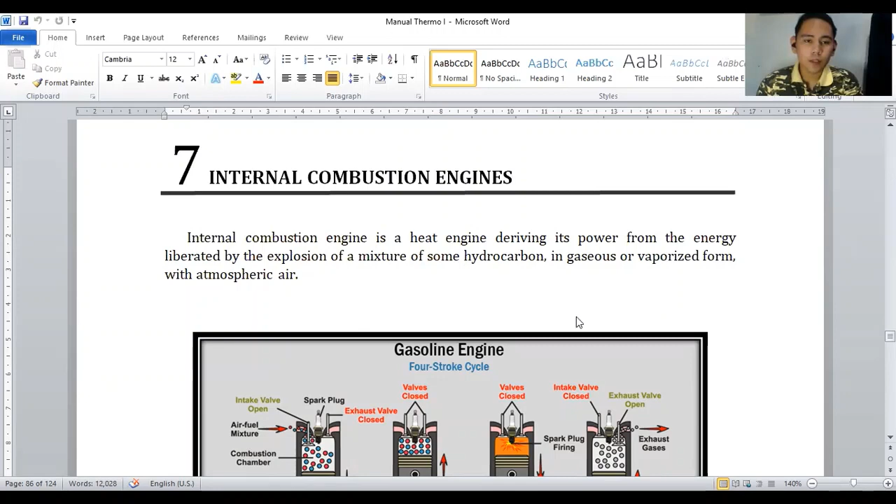The internal combustion engine is a heat engine deriving its power from the energy liberated by the explosion of a mixture of some hydrocarbon in gaseous or vaporized form with atmospheric air. So the internal combustion engine is a heat engine deriving its power from the energy liberated by explosion.

When you say explosion, it means combustion. When you say combustion, there is a fuel and air presence. In combustion engineering, a higher subject of mechanical engineering, you will tackle the combustion of different kinds of fuel. We have many different fuels.

And then when you pair it with air, what is its product? It should be water, carbon dioxide, and if there's excess air or insufficient air, it will have carbon monoxide.

But this time in Thermodynamics 1, we're going to tackle the fundamentals of the internal combustion engine, which is the cycle, the Otto cycle and the diesel cycle.

The first cycle is the gasoline engine or the gasoline cycle. The gasoline engine is also called the spark ignition engine. When we say gasoline engine, it is the Otto cycle.

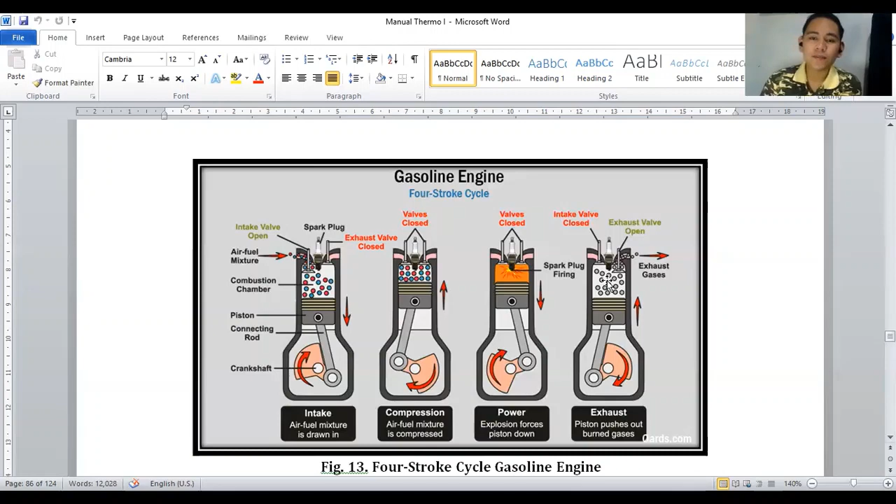And then the other half revolution, or the second revolution, which is the exhaust - everything that burns produces smoke. So therefore, the exhaust gases after the combustion will pass through the exhaust valve.

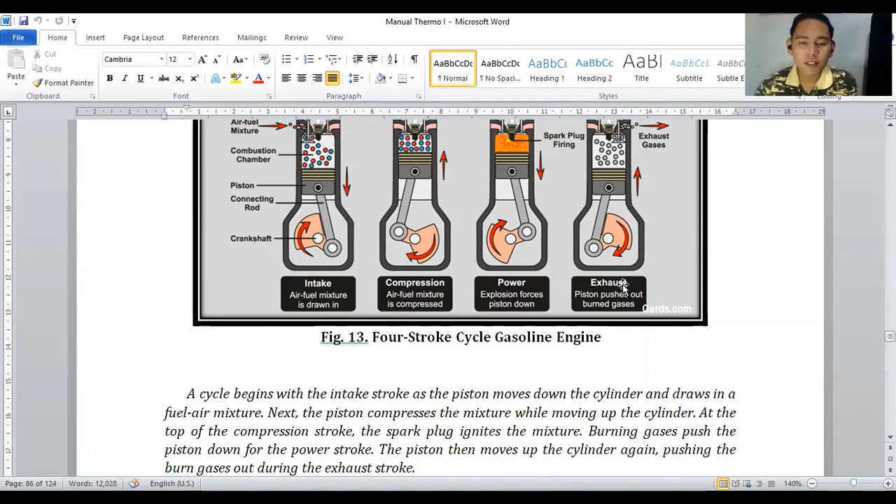So therefore, your half revolution, 1 revolution, 1.5 revolution, and the second revolution. So therefore, there are 2 revolutions that take place in a 4-stroke cycle gasoline engine.

A cycle begins with the intake stroke as the piston moves down the cylinder and draws in a fuel-air mixture. Next, the piston compresses the mixture while moving up the cylinder. At the top of the compression stroke, the spark plug ignites the mixture. Burning gases push the piston down for the power stroke.

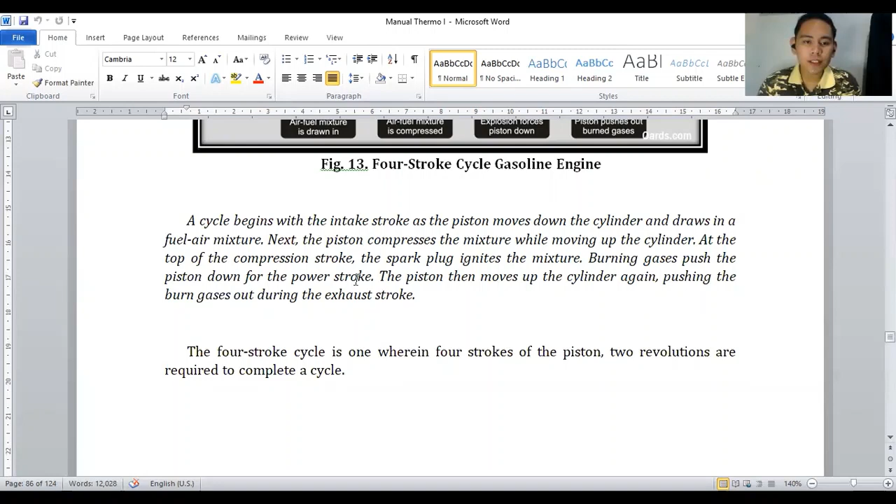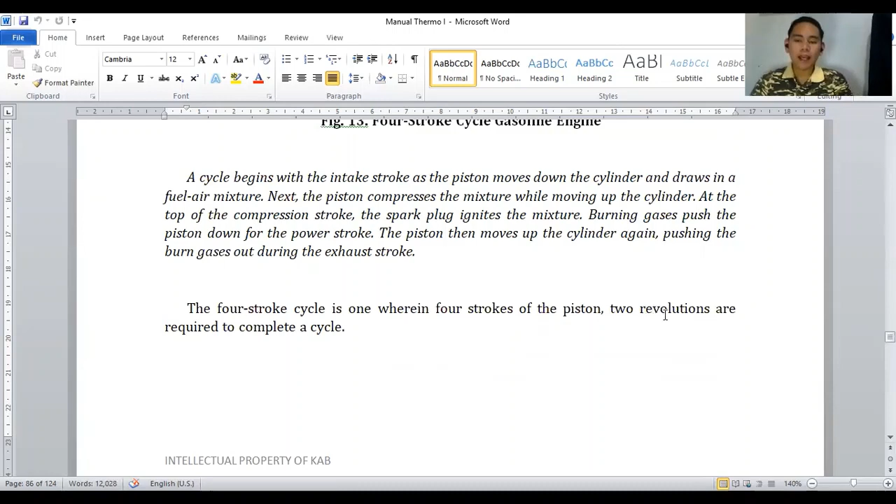The piston then moves up the cylinder again, pushing the burnt gases out during the exhaust stroke. Now, the 4-stroke cycle is one wherein 4 strokes of the piston, 2 revolutions are required to complete a cycle.

Now for the Otto cycle, as I said, the gasoline engine is an Otto cycle. The Otto cycle is the ideal prototype of a spark ignition engine. The spark ignition engine is also called a gasoline engine.

Now for the process of the Otto cycle, what's better for us to know is the TS diagram. Why? Because there is the isentropic process in it. So therefore, it's easy for you to draw the diagram of an Otto cycle if it is on a TS diagram.

So therefore, we'll focus on the TS diagram. Of course, I also showed you how to draw it in a PV diagram, but this is easier for you to draw. Now, for the TS diagram of the Otto cycle, the first process is process 1 to 2.

Process 1 to 2 is the isentropic compression. Next is the process 2 to 3, which is the constant volume heat addition. So therefore, it is constant volume.

And then for 3 to 4, the isentropic expansion. And for 4 to 1, constant volume heat rejection, or the isometric process.

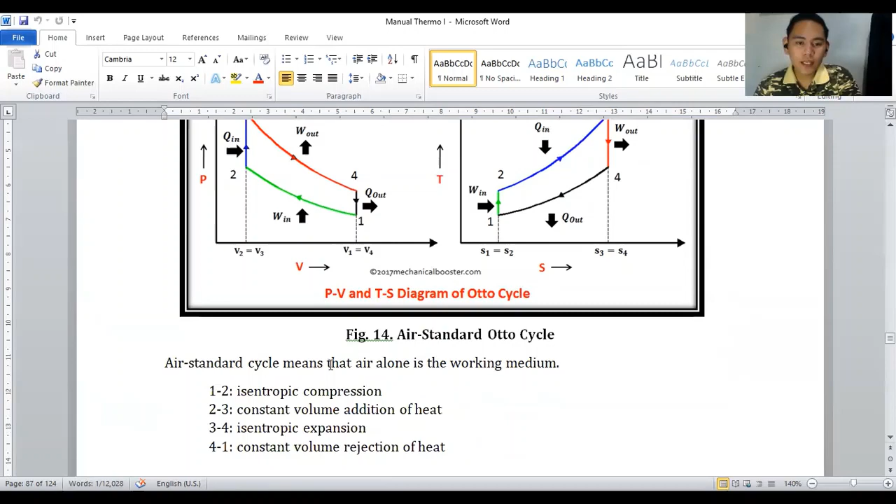Now, for the air standard cycle, it means that the air alone is the working medium. So for the analysis of the Otto cycle, if you can comprehend or understand the drawing of the TS diagram of the Otto cycle, it's easy for you to derive from this equation, from this diagram, all the formulas you need to solve a problem.

So for the analysis of the Otto cycle, you have your QA. QA is the process of 2 to 3. Therefore, what is our process 2 to 3?

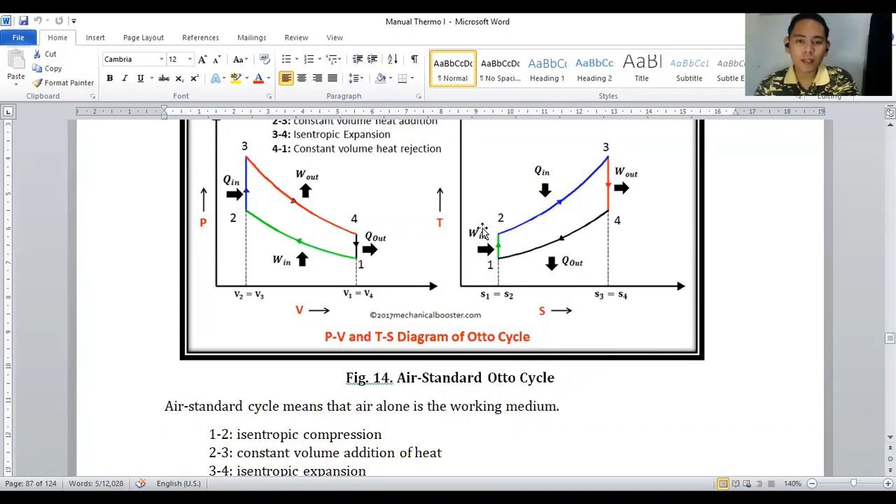2 to 3 natin is isometric heat addition. So therefore, what is the formula on Q in constant volume? mCv delta T. Please be careful on the usage of the specific heat. Ito ay Cv kasi constant volume.

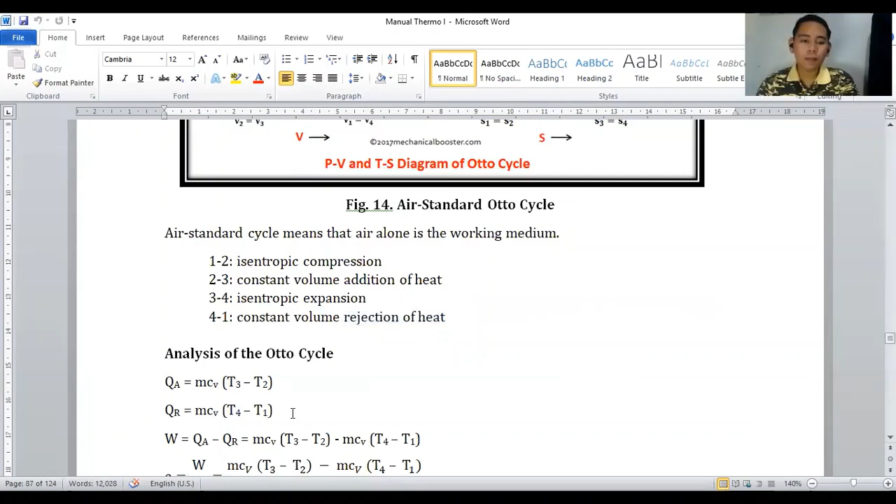So therefore, it is mCv delta T. And for the Qr, which is the heat rejection, process 4 to 1, which means it is constant volume or isometric.

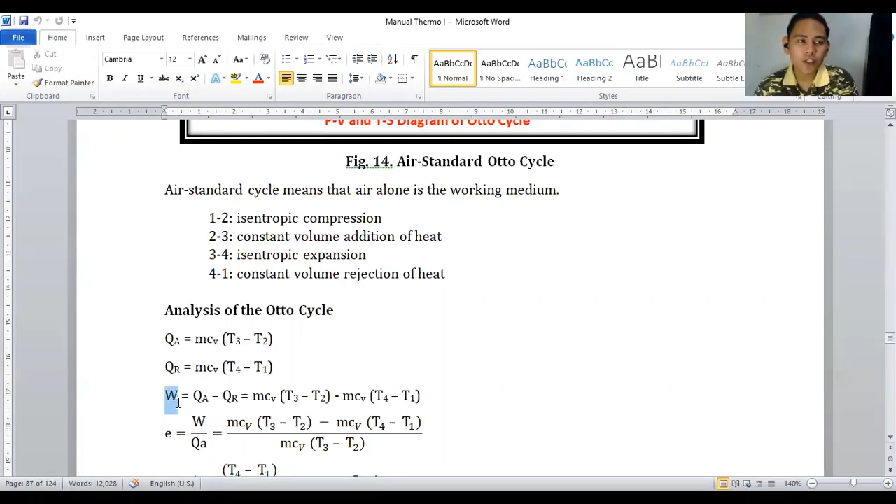So therefore, mCv delta T pa din yung gagamitin mong formula. Now for the work, just like what I said on the Carnot cycle, energy in equals energy out. So therefore, your input equals your output plus your heat rejection. So therefore, your output here, which is your work net, is equal to your Q added minus your Q rejected. Then for your efficiency, which is work net over Q added, or your output over your input, to solve your efficiency. And this is the derived formula here.

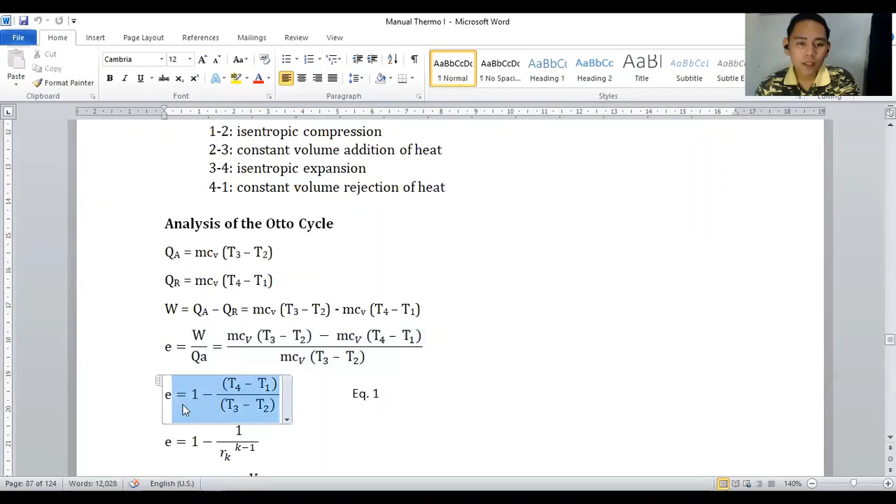Dinerive lang natin siya. Therefore, you have another equation for your efficiency in Otto cycle, which is 1 minus T4 minus T1 all over T3 minus T2. This is in terms of temperature. So kung sa problem, ibinigay na temperature yung lahat, madali mo nang ma-solve yung efficiency.

And now, another equation for the efficiency is using the isentropic compression Rk, which is 1 minus 1 over Rk raised to K minus 1. The formula for Rk is V1 over V2. How to solve? Paano natin ito na-derive? Let's discuss the derivation of the formula for efficiency.

On process 1 to 2, kung matatandaan nyo, process 1 to 2 is the isentropic compression. So anong PVT relationship natin sa isentropic? TVK, TPK. Dito si TVK yung gagamitin natin. So T2 over T1 equals V1 over V2 raised to K minus 1.

V1 over V2 is equivalent to Rk. Therefore, your T2 equals T1 times Rk raised to K minus 1. TVK, okay, so don't forget. Tapos isa naman is Tpk. You have your pressure and your K minus 1 over K.

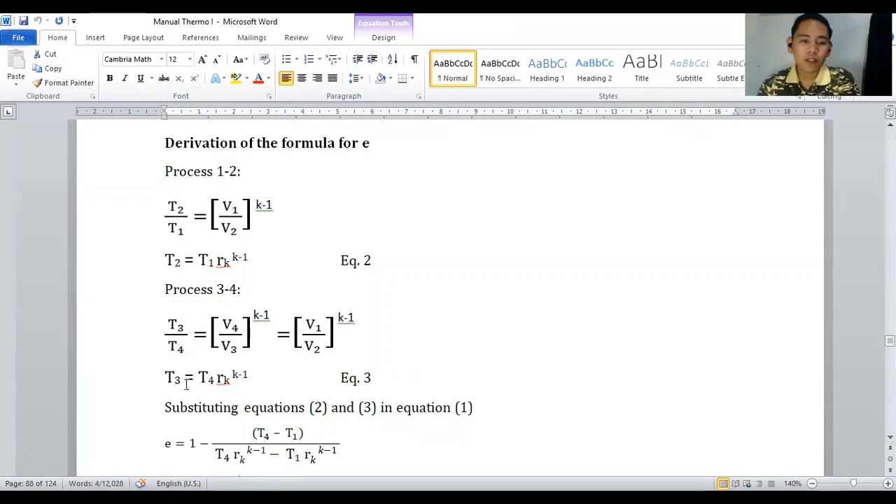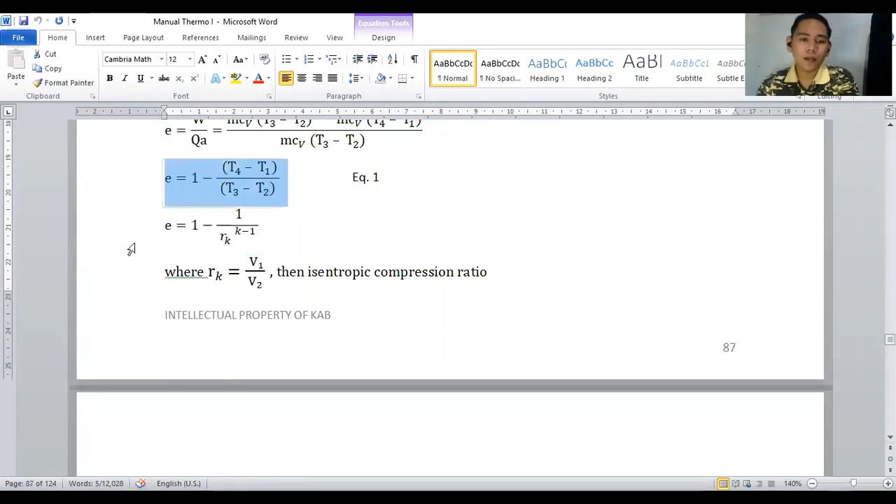Now for the process 3 to 4, process 3 to 4 is the isentropic expansion, TVK ulit. So therefore, your T3 equals T4 times Rk raised to K minus 1. Now substituting equation 2 and 3 in equation 1, which is this, the formula now would become 1 minus T4 minus T1 all over T4 times Rk raised to K minus 1 minus T1 times Rk raised to K minus 1.

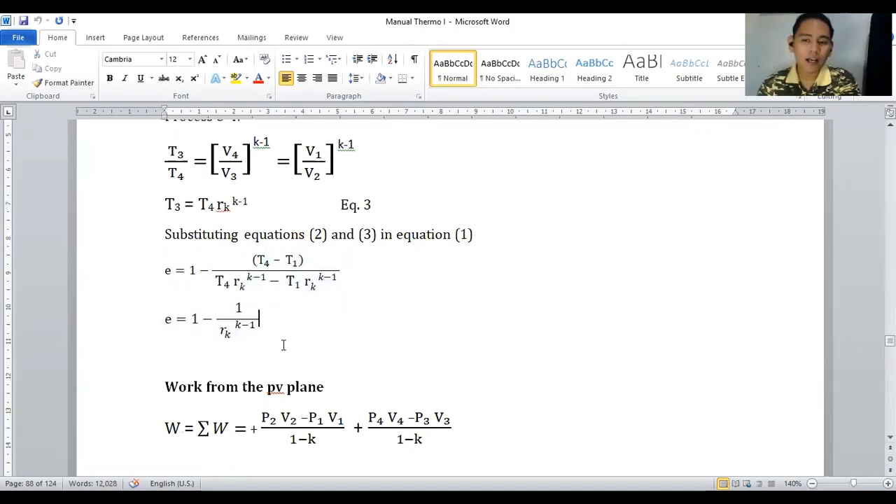Now, using the property of equality, your T4 minus T1, quantity T4 minus T1, is times Rk raised to K minus 1. So therefore, you have to cancel out the T4 minus T1. Ang matitira mo lang is 1 over Rk raised to K minus 1. So that is the derived formula of the efficiency.

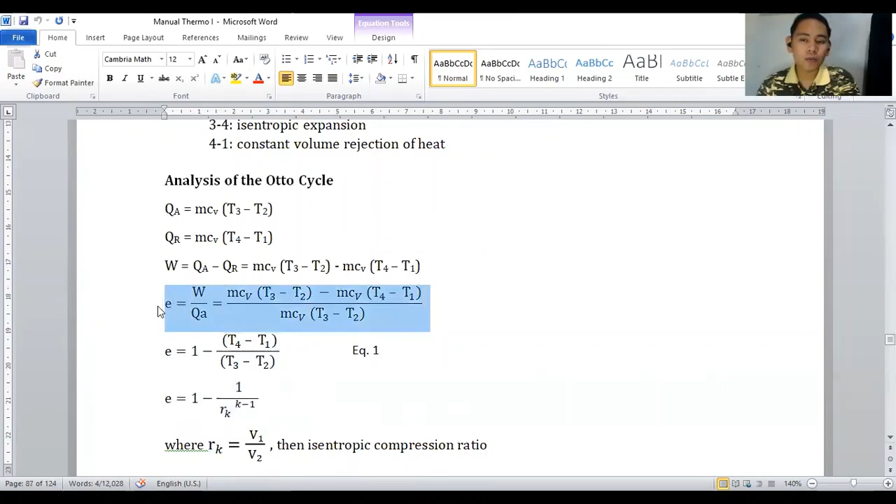So therefore, you have three formulas of efficiency: one in terms of temperature, one in terms of isentropic compression, and one in terms of output over input.

Now for the work from the PV plane, your work is the summation of all the works in the process: work 1 to 2, work 2 to 3, work 3 to 4, work 4 to 1. Okay, so for the clearance volume or the percent clearance, now we will introduce the clearance volume, the percent clearance. Why? Because there are some problems that have a percent clearance, which is easy for you to solve for the isentropic compression, because isentropic compression is equal to 1 plus C all over C.

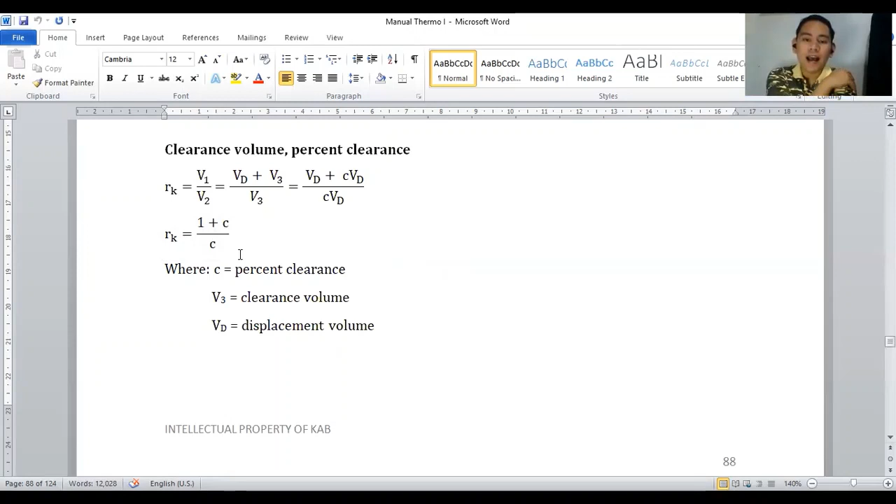So ito lang yung tatandaan mo pag meron kang percent clearance. And ang tip ko sa inyo, you have to solve first, or find first, the value of Rk, for you to easily solve the remaining parameters. Kasi mas madali kapag meron ka ng value ng Rk.

Now for the ideal standard of comparison, the cold air standard K equals 1.4, and the hot air standard K is less than 1.4. Now this less than 1.4 standard is 1.3. So the technique: kung 1.4 siya, there are 4 letters in 'cold'. So therefore 1.4 siya. Whereas sa 'hot', 3 letters lang, so 1.3 siya. Para hindi kayo magkabaliktad kung ano yung inyong K for cold and hot air.

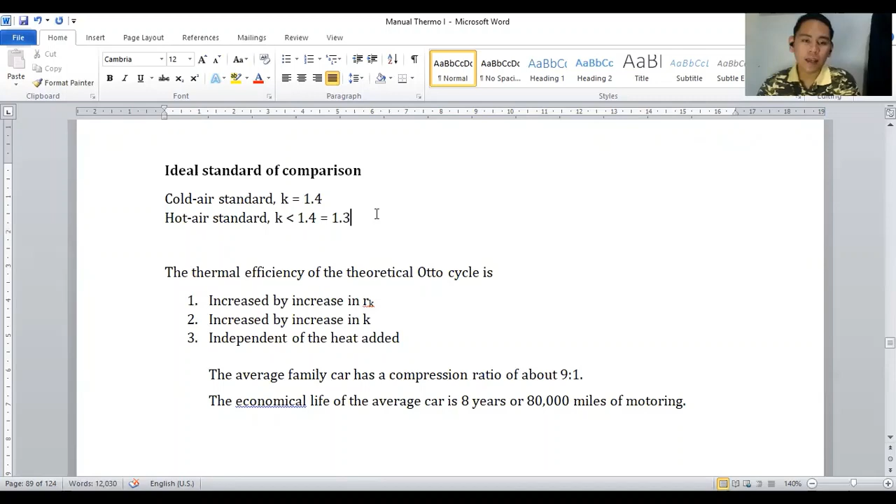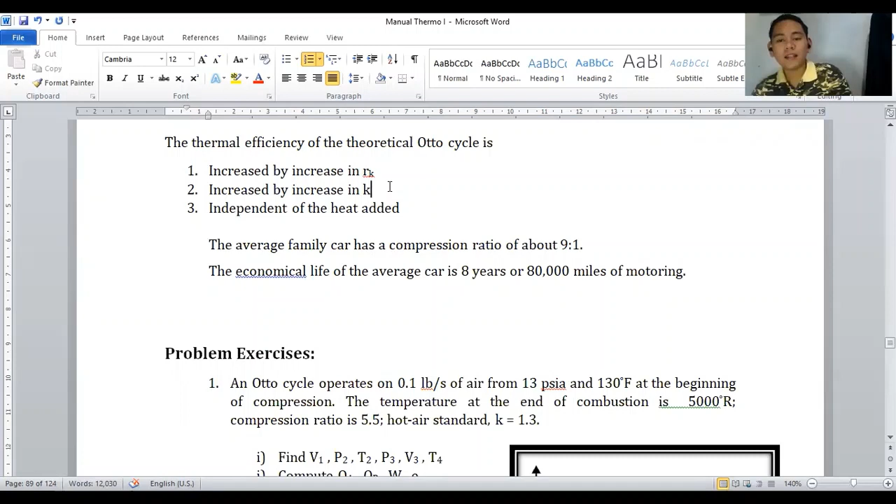Now for the thermal efficiency of the theoretical Otto cycle, it is increased by increase in Rk. Therefore, the higher the Rk, the higher the efficiency. For the increase by increase in K, the higher the K factor, the air factor, the higher the thermal efficiency. And it is independent of the heat added.

Now, the average family car has a compression ratio of 9:1. Sa problem, ganito pag minsan ang binibigay: proportion, 9:1. So therefore, ano ang compression ratio mo dyan? Your Rk is equivalent to 9 because 9 over 1 yan. But another example, if your compression ratio is 10 over 5, therefore 10 divided by 5, ang compression ratio mo ay 2.

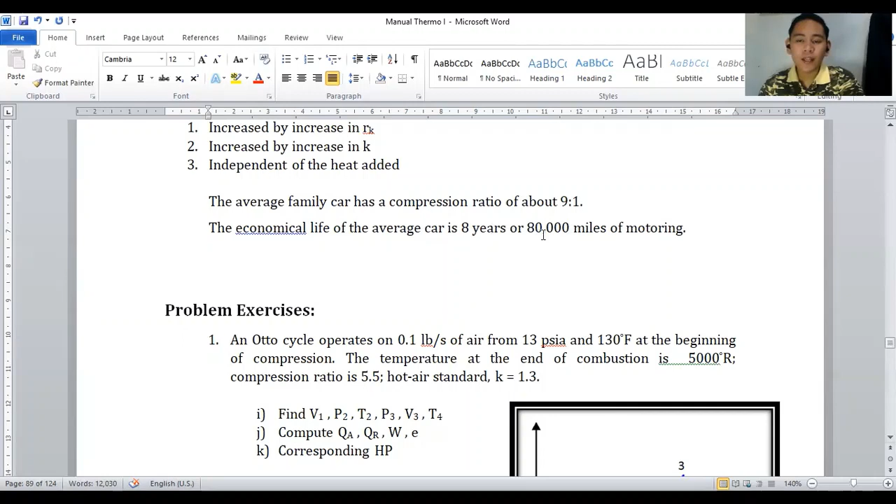Ano, ganun lang. Now, the economical life of the average car is 8 years or 80,000 miles of motoring. So if you are going to buy a second-hand car from model 2012, pwede mag-isip-isip kayo kung gusto nyo pa ding bilhin. Why? Kasi ang claim natin dito is the economical life of the average car is 8 years. So kung 8 years na siya at gusto mo pa ding bilhin, baka masiraan kayo from time to time and you have to overhaul it. And the worst, parang sa pagpapagawa nyo, mas maganda pa bumili kayo ng bago. So you have to be very careful sa span ng engine. It should be not more than 8 years, or the 80,000 miles of motoring, whichever comes first.

Now let's solve problem exercise number 1. An Otto cycle operates on 0.1 pound per second of air from 13 psi and 130 degree Fahrenheit at the beginning of compression. The temperature at the end of combustion is 5,000 degree Rankine. Compression ratio is 5.5. Hot-air standard, K is 1.3. Find the V1, the P2, the T2, the P3, the V3, and the T4. Compute the Q added, the Q rejected, the work net, and the efficiency, and its corresponding HP.

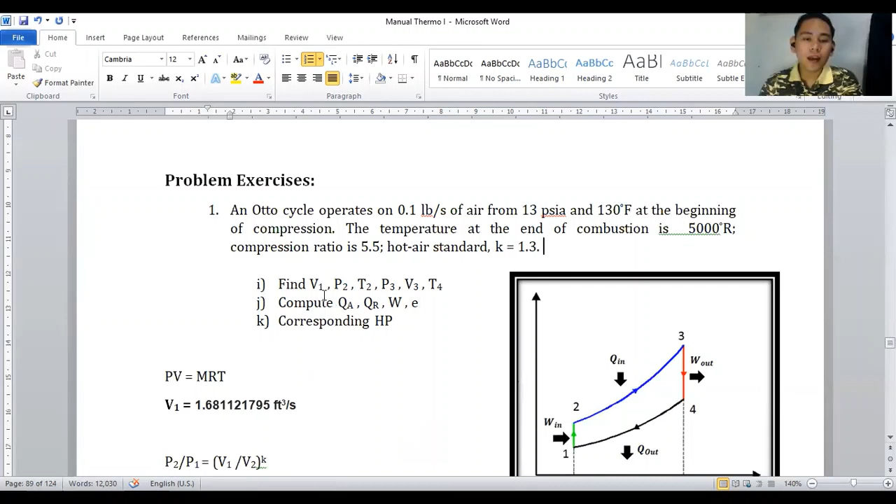Now let us go to letter A muna, letter I, the V1, which is at point 1. So you have your values: mass, P1, T1. Using the equation PV equals MRT, you can solve for V1. Your pressure is 13 psia, your volume is your hinahanap, your mass is 0.1 pound per second, your R which is constant 53.34, and your temperature which is 130 plus 460. Therefore, V1 is equivalent to 1.68... 1121795 cubic feet per second.

Now for the P2, the process dinaanan niya is isentropic. Hindi ka pwedeng mag-rely dito sa process na isometric — ang pagso-solve ng bawat state point ay depende kung anong process ang madadaanan niya. So sa process 2, nadaanan mo isentropic process. Kaya gagamit tayo ng P2 over P1 equals V1 over V2 raised to K. Itong formula na ito ay pinagsama lang natin si Tita Vicky at saka si Tita K. Pag pinagsama mo iyon, tinanggal mo ang temperature, ito na ang magiging kalalabasan na equation. So you have your P1 which is 13 PSIA, you have your V1, pero wala tayong V2. But meron tayong compression ratio, kasi ang compression ratio ay equivalent sa V1 over V2. So therefore, your P2 is equal to P1 which is 13, times 5.5 raised to 1.3.

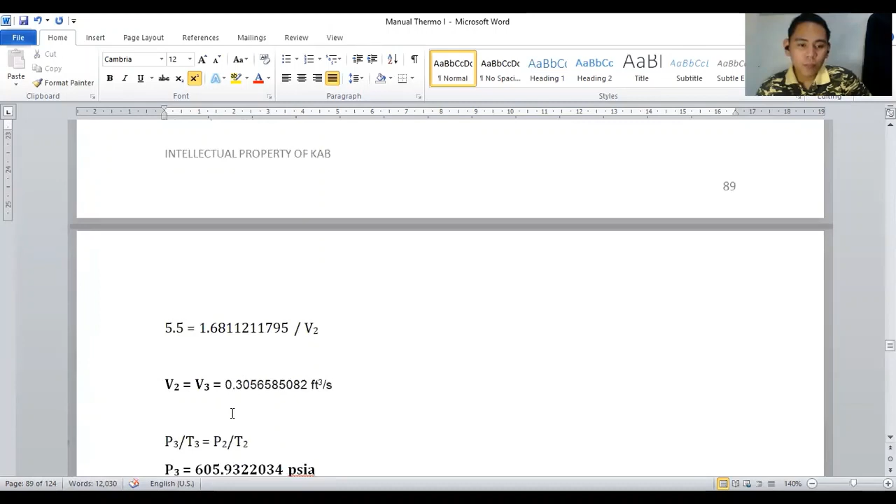Which is equivalent to 983.9223335 Rankine. And for your P3 naman, nadaanan na natin ito — ang process natin dito ay isometric heat addition. So ano ang formula sa pagkuha ng pressure sa isang PVT relation sa constant volume? Tandaan natin: P1V1 over T1 equals P2V2 over T2. So doon natin siya kukuhanin. Therefore sa pagkuha ng P3, P3 over T3 equals P2 over T2. Your T3 which is 5,000 degree Rankine, your P2 which is yung sinolve natin na 119, and your T2 which is yung ating sinolve kanina na 983. Therefore, your P3 is equivalent to 605.9322034

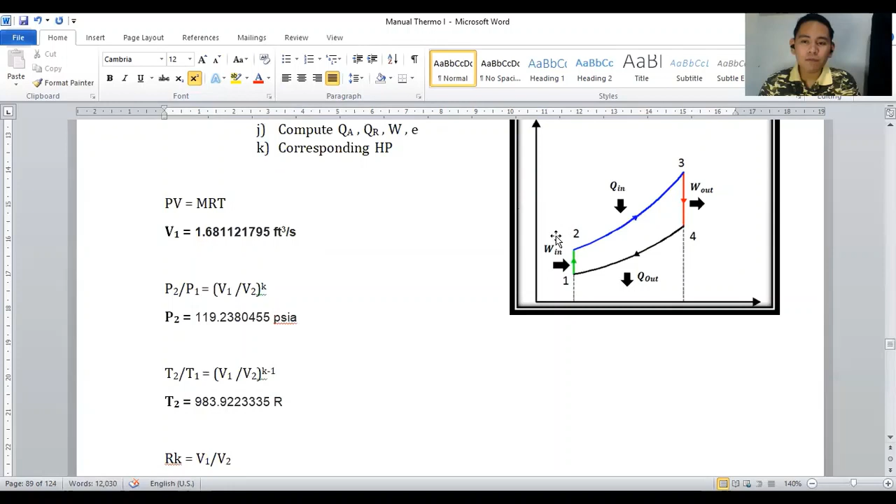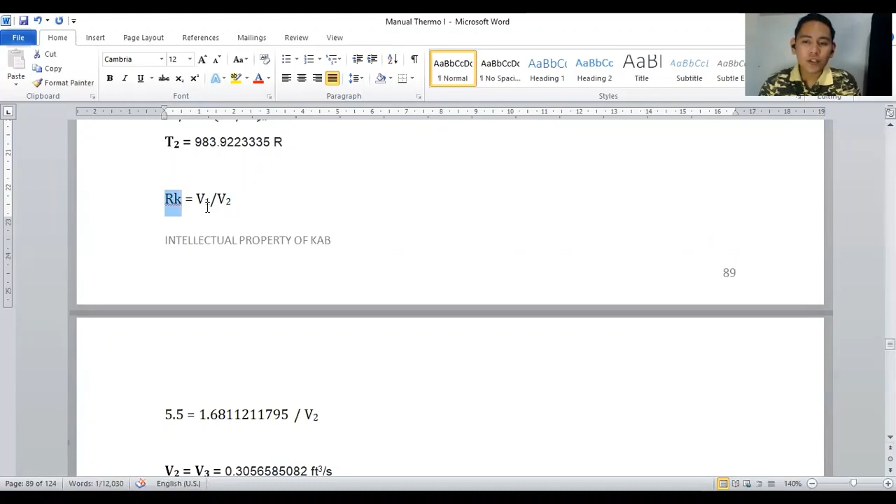PSIA. And now for V3, volume 3 naman tayo. Nadaanan natin dito ay isometric heat addition. So bago natin makuha ang V3, kailangan muna natin masolve ang mga V dito. Meron na tayong V1, wala tayong V2, wala rin tapos ito naman ang V3 na hinahanap natin. Now take note na ang process 2 to 3 ay isometric, so it is constant volume, therefore V3 equals V2. At para mahanap naman natin ang V2, meron naman tayong compression ratio di ba, which is 5.5. Compression ratio is equals to V1 over V2. So therefore, 5.5 equals V1 which is yung sinolve natin kanina, all over V2. So therefore, V2 equals V3 equals 0.3056585082 cubic feet per second.

And now for the last problem, for the last required sa letter A, ang T4. Sa process 4 natin at point 4, ang dinaanan natin ay isentropic. So therefore si Tita Vicky ulit ang pwede nating gamitin.

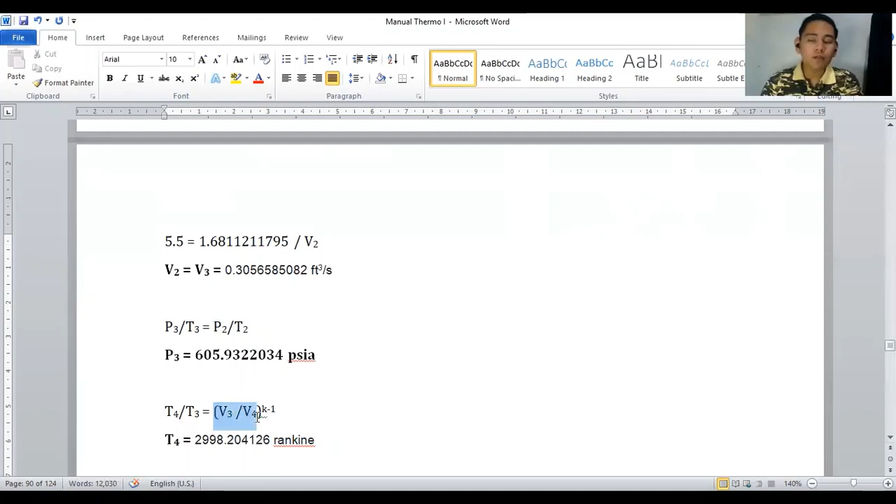T4 over T3 equals V3 over V4 raised to K minus 1. Please take note, V3 and V4 is the compression ratio as well. Kasi why? Your V1 over V2 equals V4 over V3, kasi same process lang siya. Paulit cycle lang, inulit lang - isentropic, isometric, isentropic, isometric.

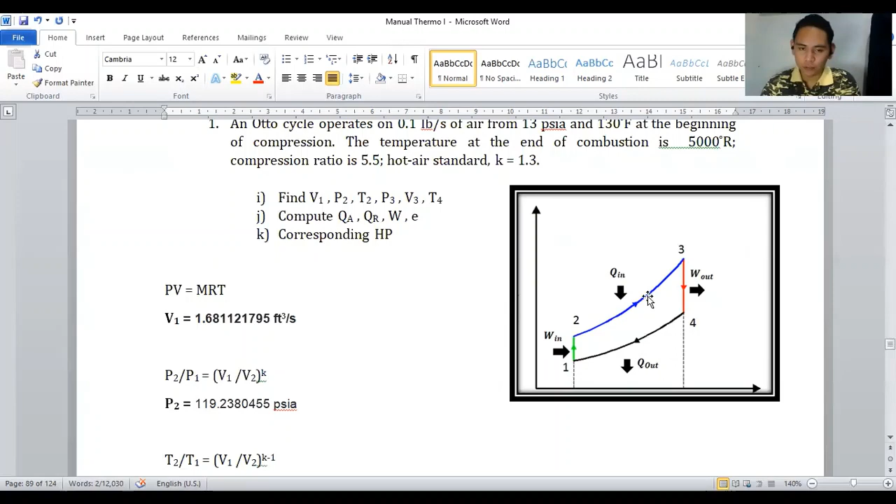So therefore, your compression ratio here can also be used there. Your T4 is equivalent to your T3, which is 5,000 times 5.5 raised to 1.3 minus 1, which is equivalent to 2998.204126 Rankine. Now, for your Q added, that's in the process 2 to 3.

Constant volume, therefore MCV delta T ang gagamitin mo. We have mass, we have T3 and we have T2, but we don't have the CV. Hindi mo siya pwedeng gamitin yung standard CV natin, kasi ang binigay sa atin ay K equals 1.3.

So you have to find first what is the value of CV. Kung matatandaan niyo yung sinabi ko dati on how to get CV and CP ng problem - kung ikaw ay CP, ikaw ay RK. Therefore, the formula for CP is RK over K minus 1, wherein for CV, ikaw ay R over K minus 1 lang. Para hindi kayo malito sa pagsasaulo ng formula.

So your CV equals R over K minus 1, which is equivalent to 53.34 divided by 1.3 minus 1, times yung ating conversion factor na 778 to make it in BTU. So therefore your CV equals 0.2285347044.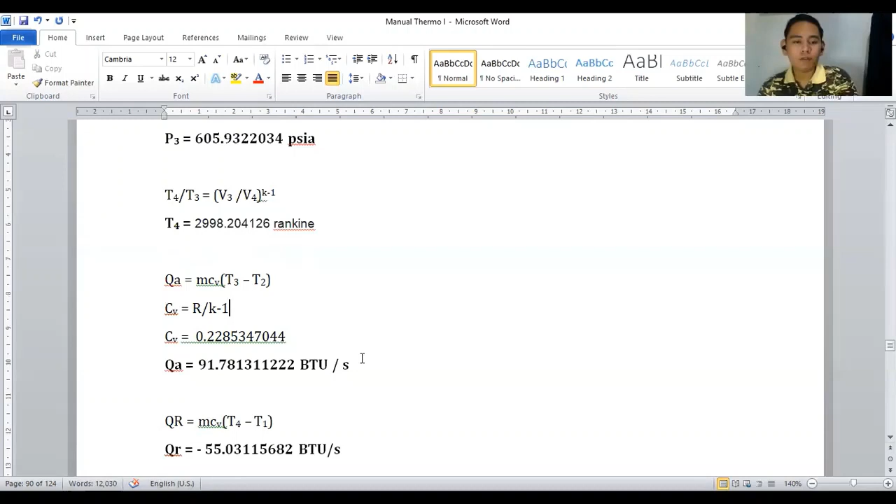And for the QA, which is MCV delta T, you have your 0.1 pounds per second, then you have your 0.228, and you have T3 minus T2, which is equivalent to 91.781311222 BTU per second. And for the QR, same process then, MCV delta T.

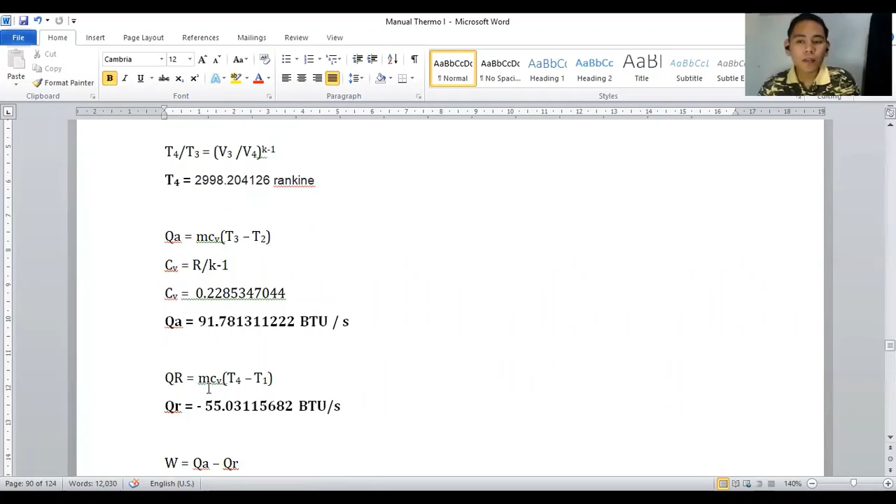So you have your negative 55.03115682 BTU per second. Now, please do not be confused on the negative sign here. This negative sign denotes that this heat is rejected, but it doesn't mean that it will carry over on the equation of work.

Kasi ang equation ng work natin is QA minus QR. So therefore, you have your 91.78 minus 55.03. Hindi mo to i-carry over itong negative kasi pag nagkataon, magiging 91.78 siya minus negative 55, so mag-iiba na ng sagot. Hindi mo siya i-carry over - it just distinguishes between the heat added and the heat rejected, yung negative sign.

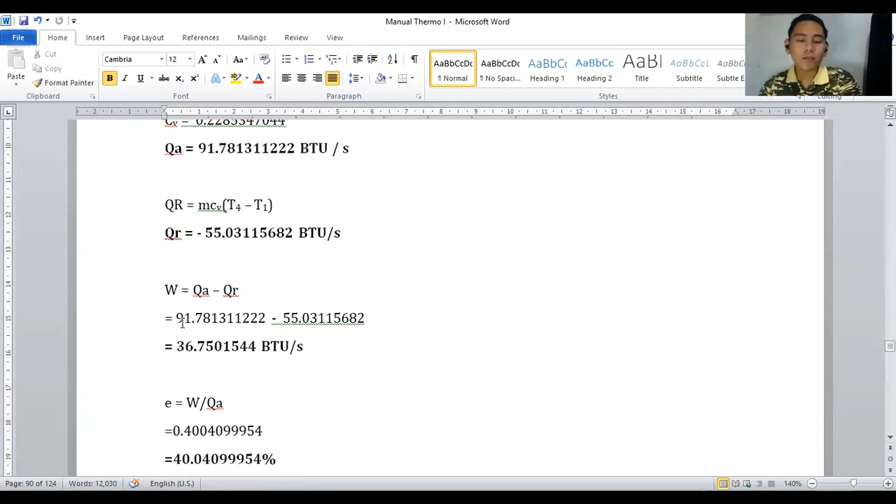So therefore, you have your work, which is 36.75. And for your efficiency, which is your output over your input, you have your 36.75 divided by your QA, which is 91.78, which is equivalent to 40.04099954%. And for your corresponding HP, all you have to do is convert your work net into HP.

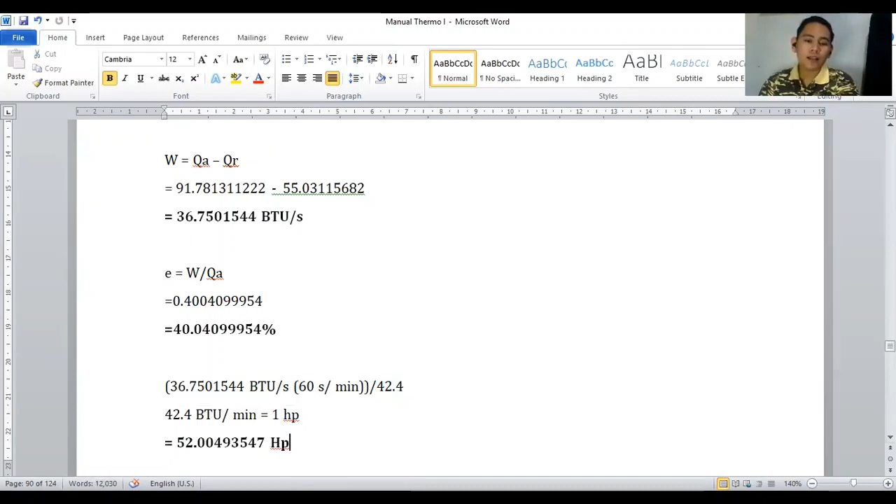Before the conversion, the conversion factor of BTU per minute into HP is 42.4, and for BTU per hour it's 2545. So, ibig sabihin, for your 42.4 BTU per minute equals 1 HP, all you have to do is convert first this work net into BTU per minute, since it's in BTU per second, and then you divide it by 42.4 to be able to get 52.00493547 HP. And that's it for the problem solving on the Otto cycle.

Ganon lang naglalaro yung mga problems sa Otto cycle. Madali lang naman siya, same process lang din.

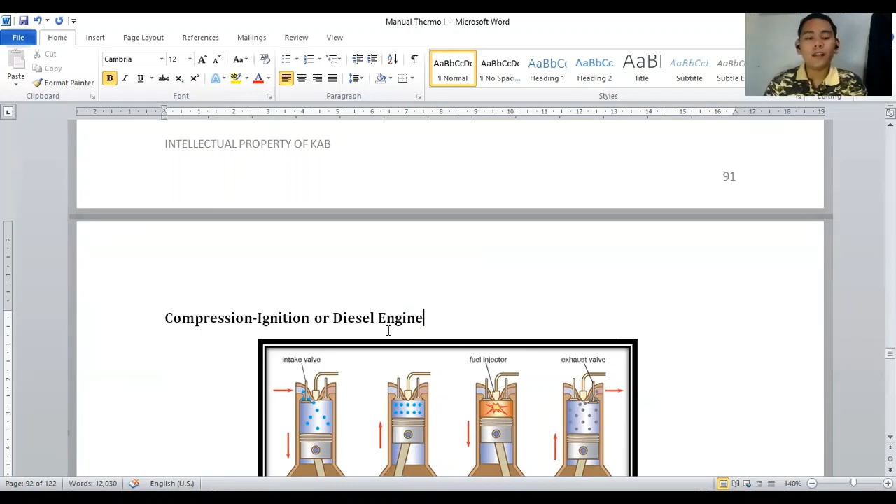And then, let's start for the compression ignition or the diesel engine. Now, the Otto cycle is spark ignition, wherein this one, compression ignition, wala na siyang spark plug para mag-trigger. Using compression, kasi mag-accumulate ng high temperature, therefore masusunog yung air fuel mixture mo, so magkakaroon ng combustion. Same process din - they have revolutions, the intake, the second revolution is the compression, the other half revolution is power, and

the other half revolution is the exhaust. So, therefore, there are 2 revolutions in a 4-stroke cycle diesel engine.

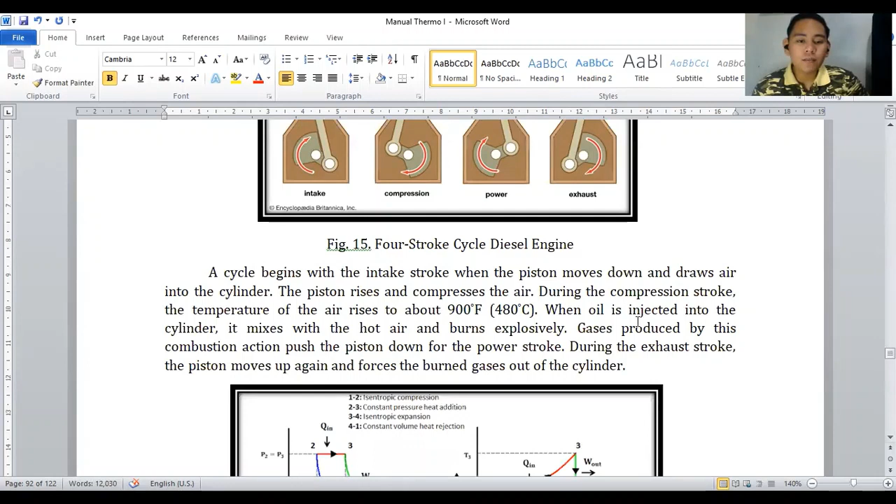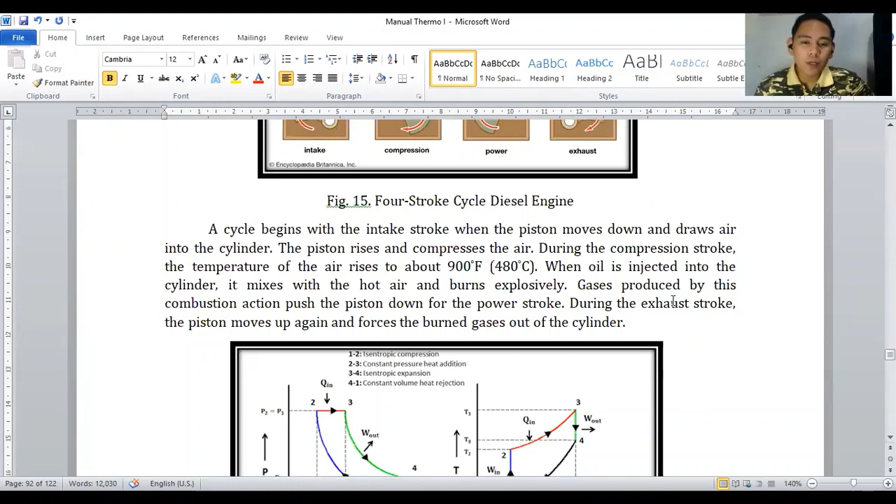Our cycle begins with the intake stroke when the piston moves down and draws air into the cylinder. The piston rises and compresses the air. During the compression stroke, the temperature of the air rises to about 900 degrees Fahrenheit. When oil is injected into the cylinder, it mixes with the hot air and burns explosively. Gases produced by this combustion action push the piston down for the power stroke. During the exhaust stroke, the piston moves up again and forces the burned gases out of the cylinder.

Now, one more thing - sa combustion engineering niyo, sa higher engineering niyo, doon niyo din malalaman bakit nga ba hindi pwedeng lagyan ng ibang gasoline, ibang gas, ibang fuel ang diesel na makina. Specifically sa mga sasakyan natin, kung diesel lang yung pwedeng ilagay, hindi pwede ang kerosene kasi masisira, kakatok.

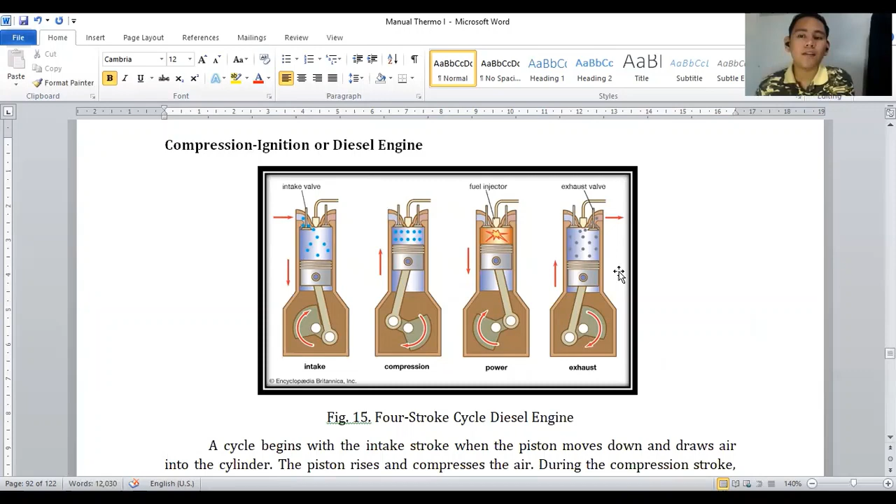Hindi naman sa kakatok, hindi siya tatakbo. Why? Kasi there are different molecular formula of the fuel. And yung diesel engine natin is designed for a diesel engine only. Hindi mo siya pwedeng samahan ng ibang fuel.

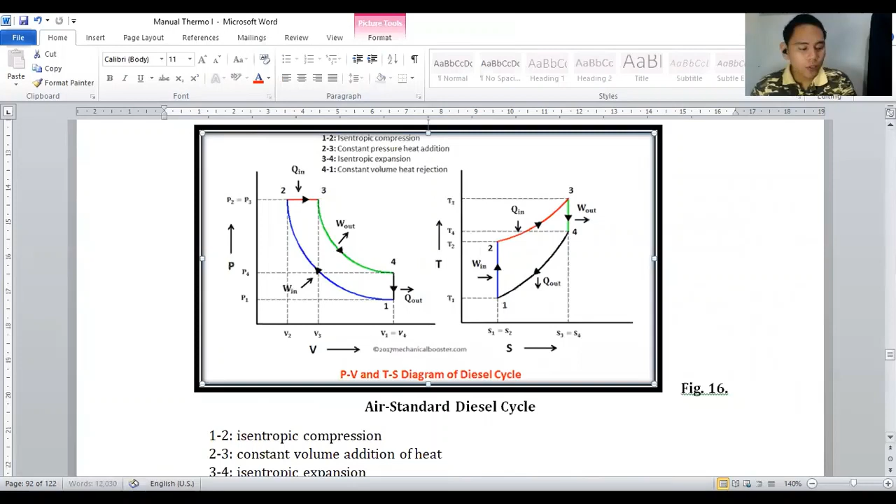So yun. Now for the PV and the TS diagram of the diesel cycle, if I were you, I'm going to use the PV diagram here instead of the TS diagram. Why? Kasi meron tayong constant pressure and constant volume sa ating process. So, mas madali kung PV diagram yung gagamitin mo.

Siya ay SPSV: the isentropic, the isobaric, the isentropic, and the isometric. Para hindi kayo malito, kung sa diesel at sa auto, sa auto kasi is SVSV. Sa diesel is SPSV. Pag sa auto, sub-sub sa auto. SVSV, sub-sub sa auto. Wherein dito sa diesel, SPSV. Sa Petron, Savi, magpa-diesel. S, isentropic. P, isobaric. S, isentropic. V, volumetric, isometric. So, SPSV, sa Petron, Savi, magpa-diesel cycle. Diesel, sa Petron, Savi, magpa-diesel. Sub-sub sa auto, SVSV.

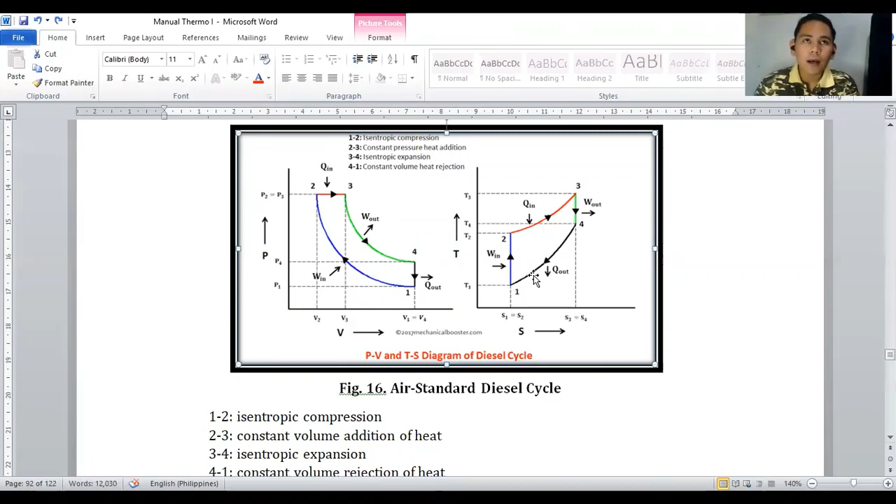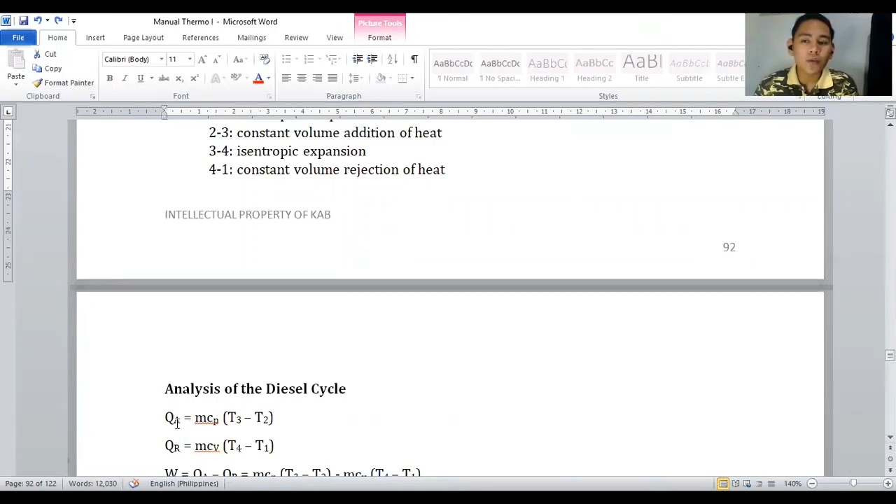Isentropic, isometric, isentropic, isometric. Now, for the analysis of the diesel cycle, QA. Ang QA natin is in the process 2 to 3, which is the isobaric heat addition. So, therefore, what is our formula for Q?

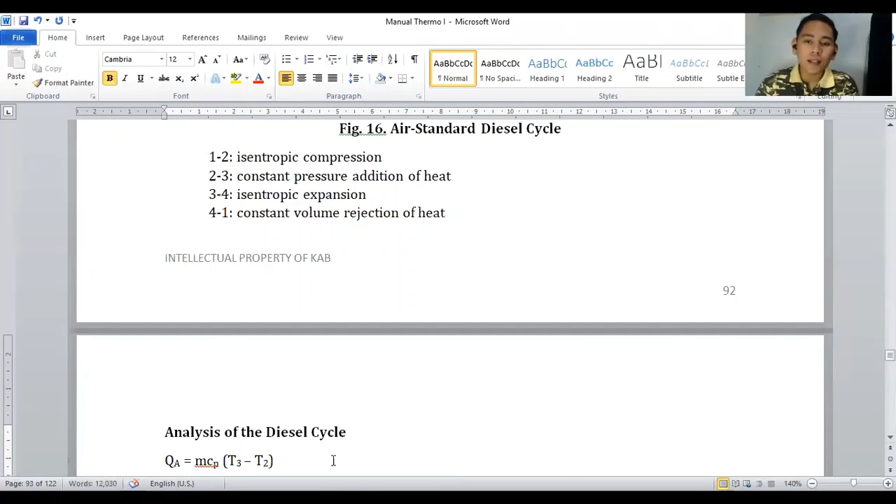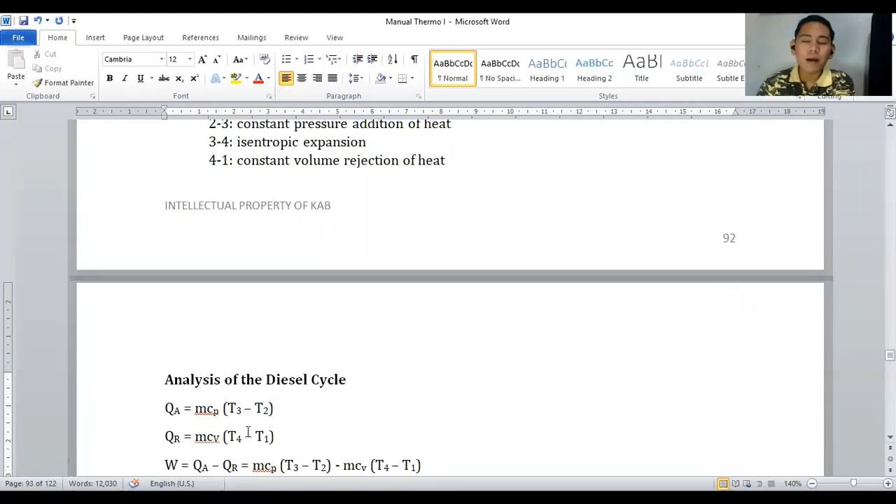Your QA is M CP delta T. So, ibig sabihin, please take note of the specific heat na gagamitin natin na constant. Since it is constant pressure, CP yung gagamitin mo. So, M CP delta T. And for your QR, which is the isometric constant volume, MCV naman yung gagamitin mo. And for your work, ganun din, QA minus QR, and for the efficiency, ganun din, which is W over QA.

Therefore, upon deriving that, we have 1 minus T4 minus T1 all over K times the quantity T3 minus T2. And po itong mahabang equation na ito? Ito ay derived formula in terms of compression ratio and cut-off ratio.

Now, the compression ratio here is V1 over V2. And the cut-off ratio is V3 over V2.

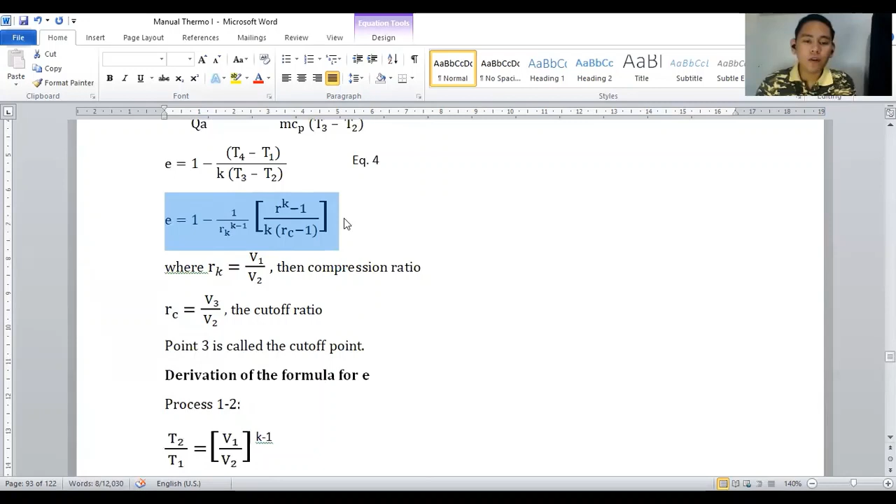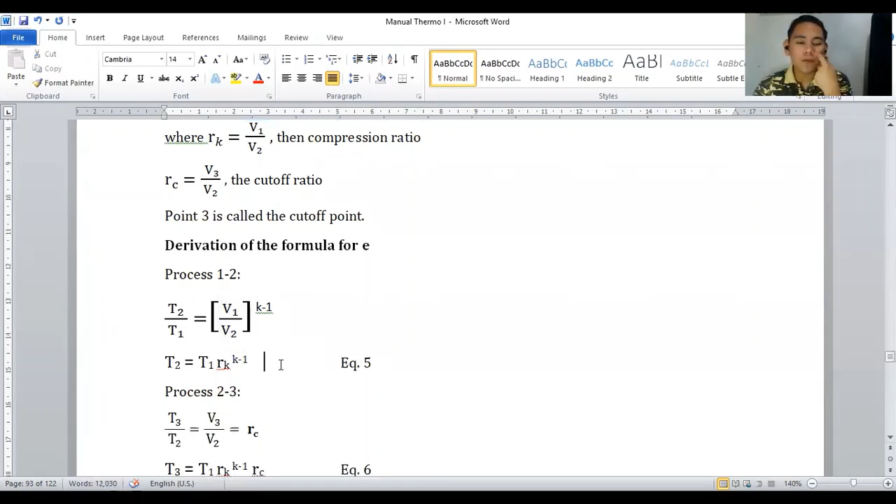Now, the derivation of the formula for efficiency, ito, how do we derive that formula? In process 1 to 2, which is the isentropic, you have T times V raised to K minus 1, which is T2 equals T1 times R sub K raised to K minus 1. In process 2 to 3, which is the isobaric, so PVT relation tayo. T3 over T2 equals V3 over V2, which is equivalent to RC.

Tapos, ang T2 naman natin ay ito. So, therefore, T3 equals T1 times R sub K raised to K minus 1, times RC.

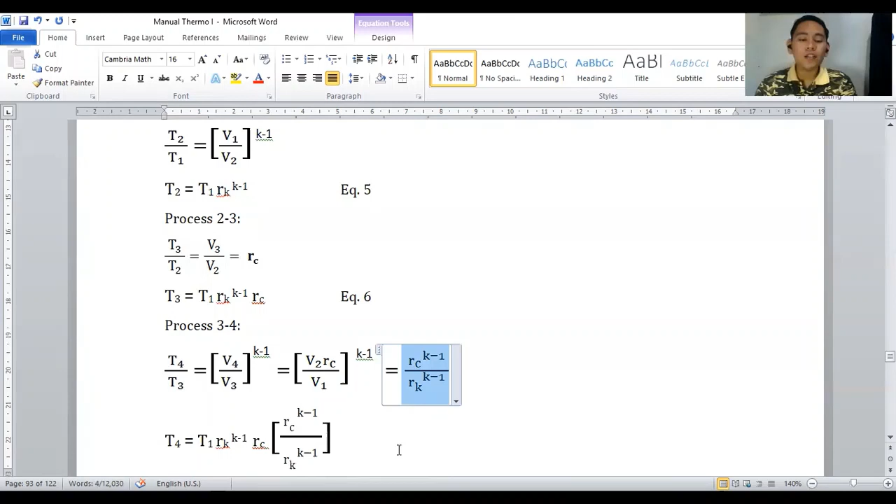And for process 3 to 4, isentropic, si T times V raised to K minus 1 ulit. Ito, so therefore sinubstitute lang natin, you have your RC times R raised to K minus 1 over R to the K raised to K minus 1, which is your T4 equals T1 times R to the K raised to K minus 1, times RC, multiplied by the quantity of RC raised to K minus 1, all over R to the K raised to K minus 1.

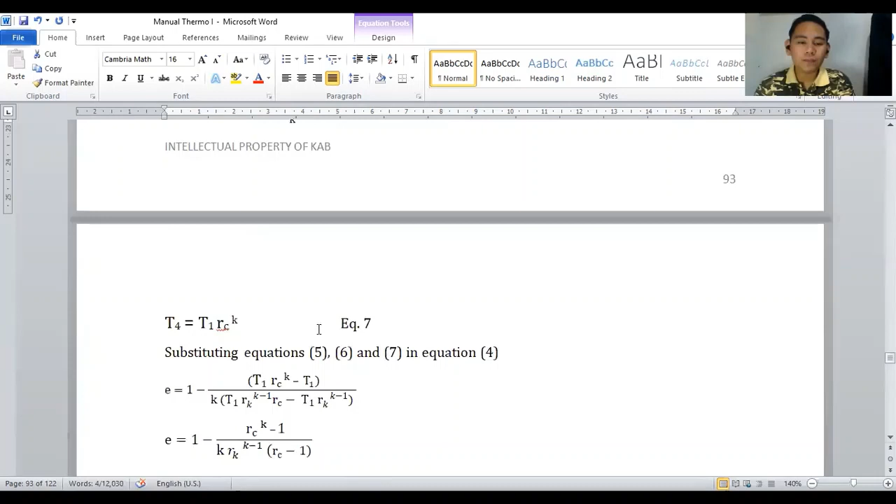And simplifying it up, we have your T4 equals T1 times RC raised to K. Now, substitute equations 5, 6, 7 in equation 4, which is your efficiency. Makakamit natin ito kapag sinimplify natin, which is 1 minus 1 over R to the K raised to K minus 1, times RC raised to K minus 1, all over K times the quantity RC minus 1.

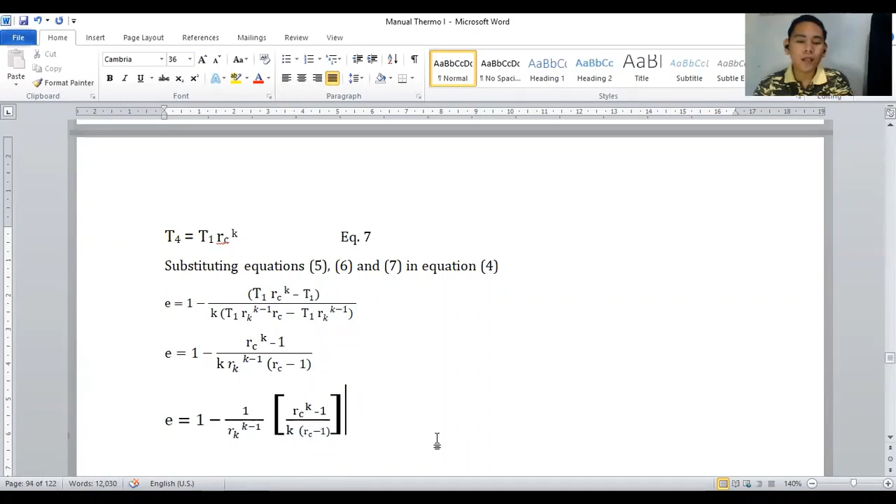Now sir, parang ito po ay familiar. This is the efficiency of Otto cycle. Can we able to solve? Is it okay to solve first the efficiency of the Otto cycle, then we multiply it by the factor of the cutoff ratio? No, it can't be.

Kasi on the rule of our mathematics, the PEMDAS rule, you have to multiply it first before you subtract it into 1. Kasi kung unahin mo i-subtract ito, then you have to multiply, magkakamali ka ng answer. Magkaiba yan ng sagot. The efficiency of the diesel cycle differs from that of the Otto cycle by the bracketed factor RC raised to K minus 1, over K times RC minus 1.

This factor is always greater than 1 because RC is always greater than 1. Thus, for a particular compression ratio, the Otto cycle is more efficient. However, since the diesel engine compresses air only, the compression ratio is higher than in Otto engine. An actual diesel engine with a compression ratio of 15 is more efficient than an actual Otto engine with a compression ratio of 9.

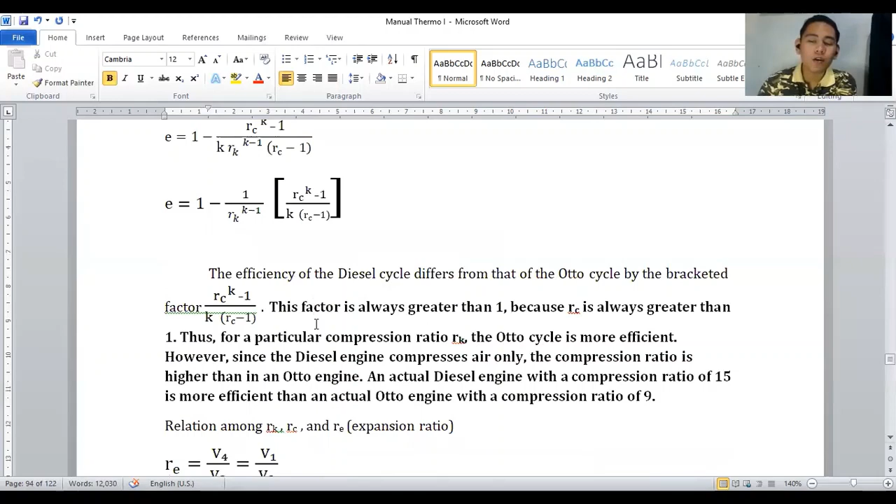For you to satisfy your curiosity, if this claim is correct, try to solve the efficiency using the compression ratio. Ang compression ratio mo is 15 sa diesel efficiency, and sa Otto naman is 9. Tapos tingnan mo kung alin yung mas mataas na efficiency.

And then, sabi din dito, RC is always greater than 1. So, therefore, sa problem pala, kapag sinabi sa problem, kahit na the cutoff ratio is ganito, pero hindi naman sinabi sa problem na it is a diesel cycle, automatic na siya ay diesel cycle. Pero may condition: kung ang RC mo is greater than 1, at hindi sinabi na siya ay diesel cycle, automatic na siya ay diesel cycle ang gagamitin mo.

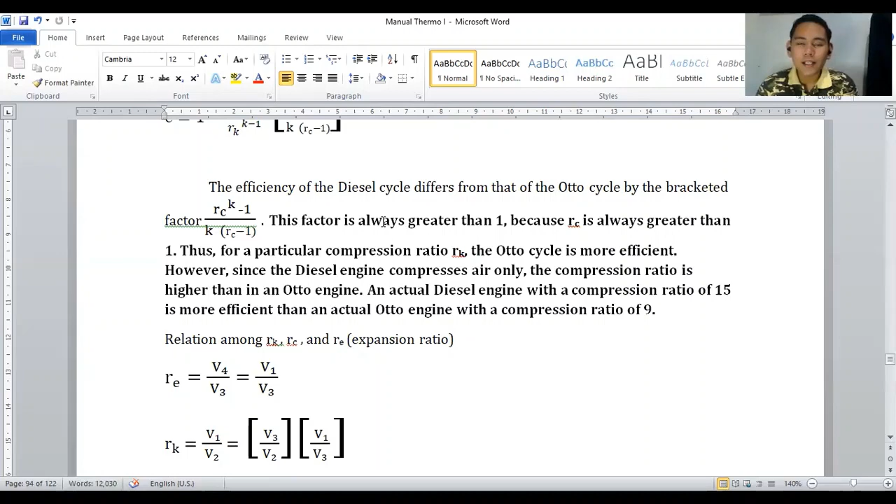But kapag siya ay RC equals to 1, kasi hindi naman sinabi kung anong type, it may be an Otto cycle, kasi kailangan ng RC mo, your cutoff ratio, is greater than 1.

Okay? Now, for the relationship among the compression ratio, the cutoff ratio, and the RE, which is the expansion ratio. The expansion ratio is V1 over V3.

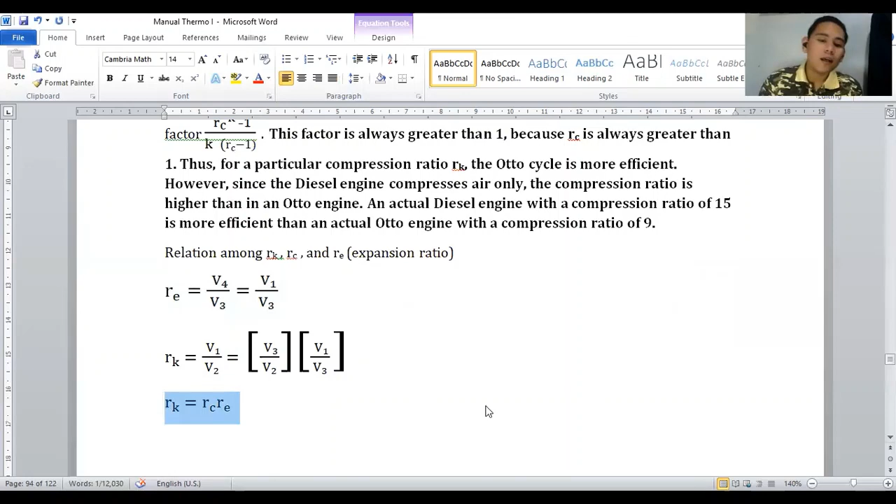Huwag kayong malilito. V1 over V3 is the expansion ratio, wherein V1 over V2 is the compression ratio. So therefore, the relationship of the three: RK equals RC times RE.

For the problem exercise number 1, a diesel cycle operates with a compression ratio of 13.5 with a cutoff occurring at 6% of the stroke. State 1 is defined by 14 psi and 140 degrees Fahrenheit. For the hot air standard with K equals 1.34 and for an initial 1 cubic foot, compute T2, P2, V2, T3, V3, P4. Compute the QR, the work net, the efficiency, the Pm (mean effective pressure), and a rate of circulation of 1000 cfm and compute the horsepower.

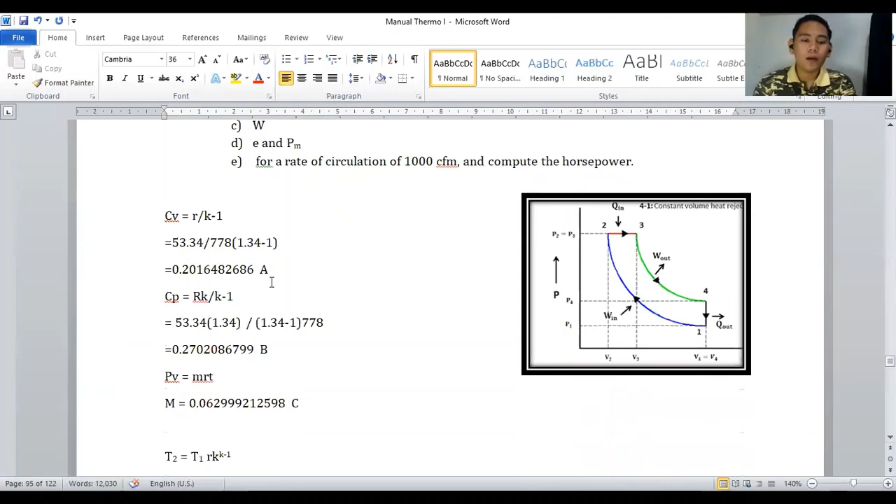Yun yung ating sagot. Now don't mind these letters. Ito kasi ay, kapag nag-solve ka, you better store it on your calculator for later use, para hindi ka na mahirapan magta-type, parang mahaba sa calculator mo, and it takes time sa pagta-type. So all you have to do is know how to store on the calculator. Kung hindi kayo marunong mag-store sa calculator, I have a separate video there. The basic calculation techniques, you may free to watch it on my video.

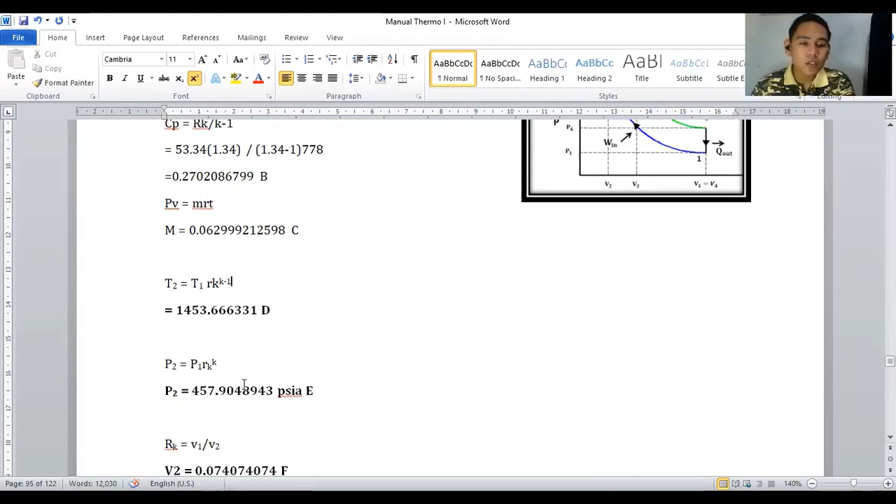Okay, now for the P2, which is P1 times RK raised to K, doon din, we have 457.90 PSIA. And for the RK, which is equivalent to V1 over V2, hanapin natin yung V2 natin.

Your RK is equivalent to compression ratio, 13.5, equals V1 which is yung nasolve natin kanina, all over V2, which is equivalent to 0.07.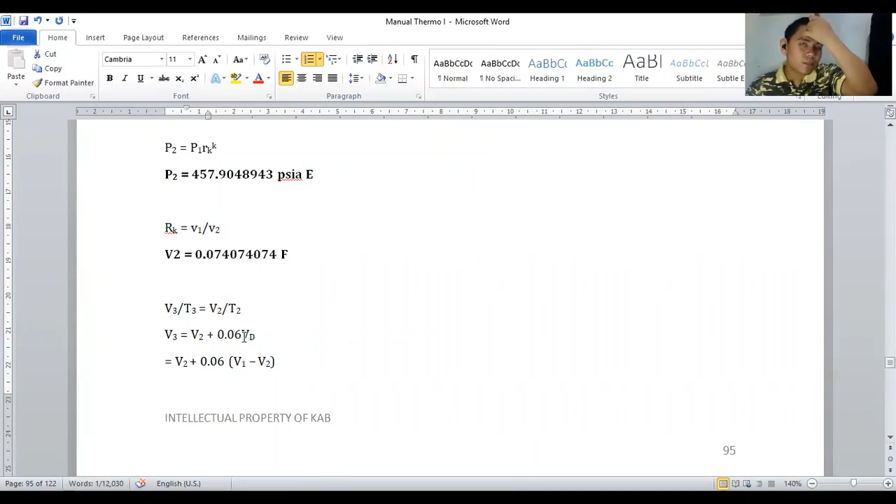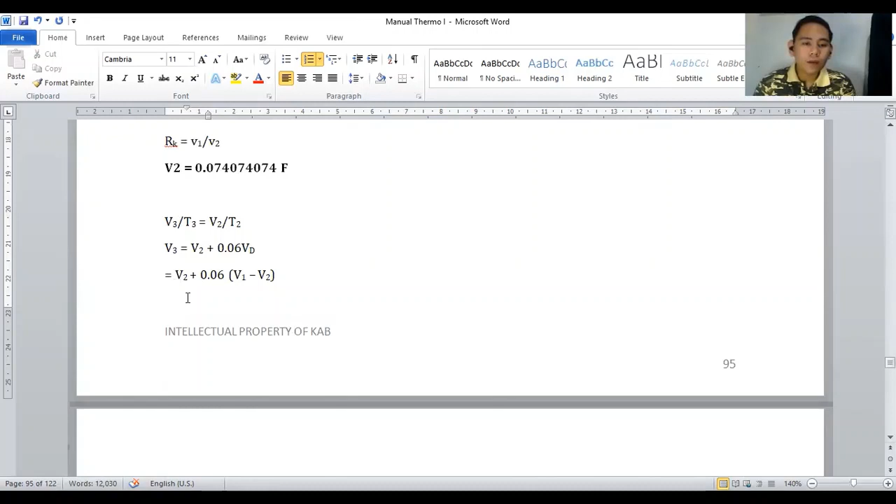And for your V3, using your percent clearance, kasi meron tayong ibinigay na occurring at 6%. You have your RC cutoff occurring at 6% of the stroke. So you have the formula of V2 plus RC times VD. So therefore, you have your V3. So you have your V2 plus 0.06 times V1 minus V2, which is your volume displacement. And you have your V3, which is equivalent to...

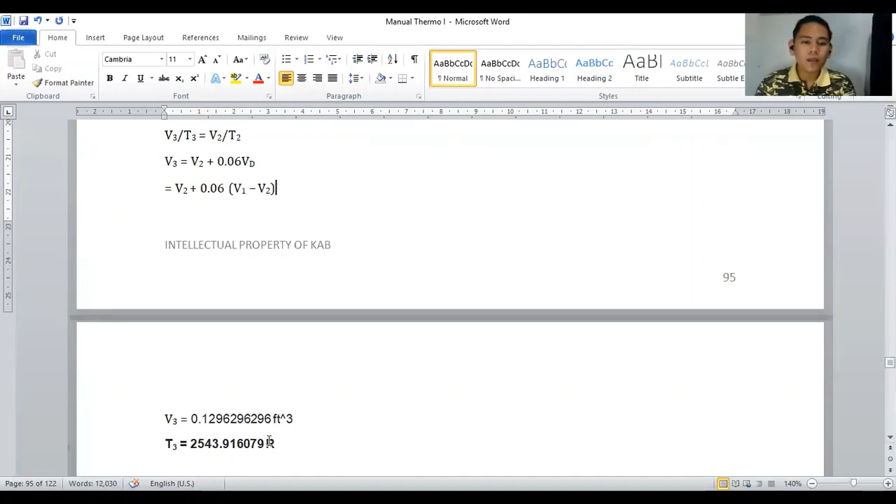0.1296296296 cubic feet. And for your temperature 3, your T3 is 2543.916079 Rankine.

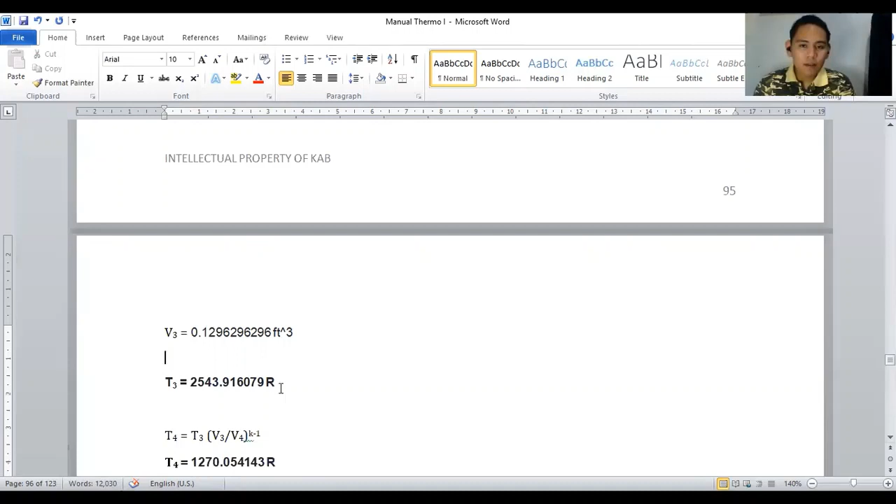And for your T4, your T3 times your V3 over V4, na-solve mo na, or pwedeng yung nasa problem, yung gamitin, which is equivalent to 1,270.054143 Rankine. And for your P4, which is P3 times V3 over V4, which is equivalent to...

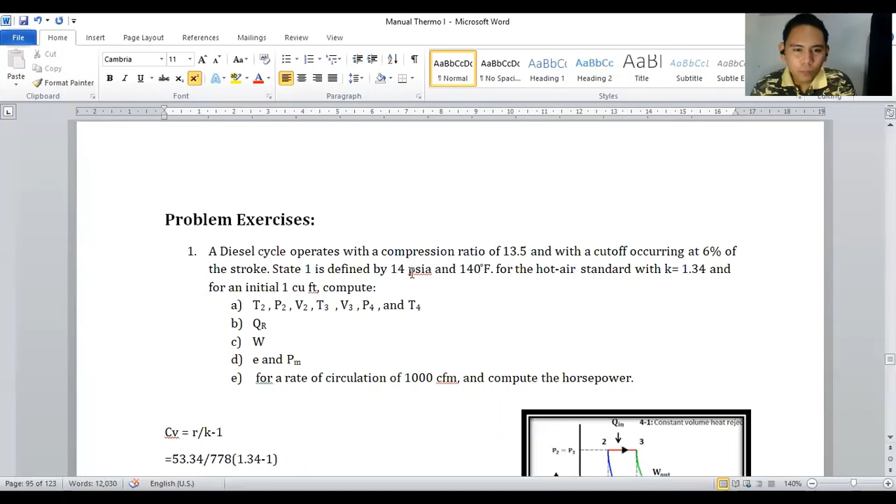29.63459667 PSIA. And for the heat rejected, is MCV delta T. So sa MCV delta T, we have your mass. May binigay tayong mass? May binigay ba? Walang binigay na mass, so therefore it is equivalent to 1.

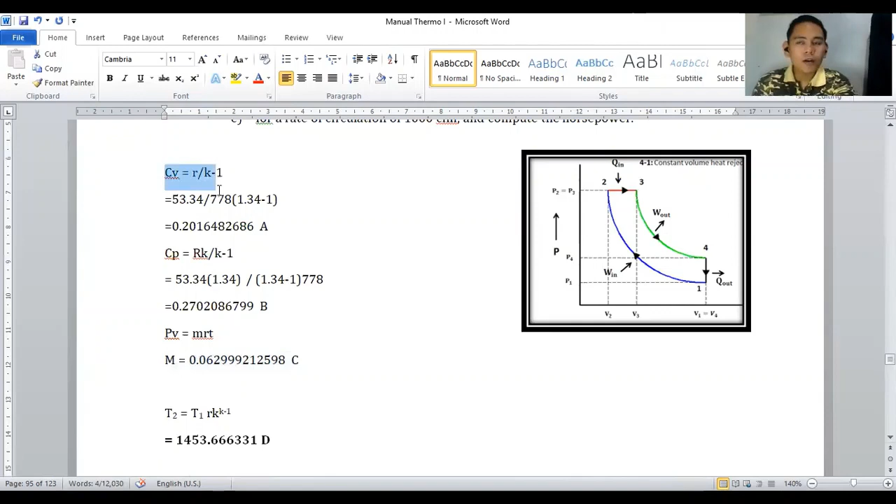And then you have your CV. Ang mass natin is kinompute natin using PV equals MRT. Ito, and you have your CV, which is ito, R over K minus 1. And then you have your CP, sinolve din natin, RK over K minus 1. So we have your MCV delta T, so makukuha natin yung QR.

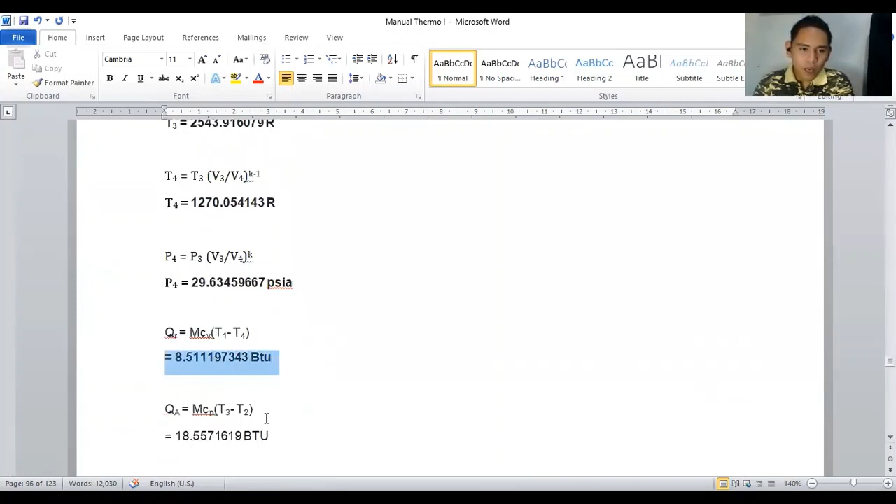And for the work net, kailangan natin ng QA. So solve muna natin yung QA, which is MCP delta T naman. And for you to solve the work net, QA minus QR, which is equivalent to 10.05. And for your efficiency, your work net all over your QA, which is 54%.

And for your mean effective pressure, you have your work all over V1 minus V2, which is 58.61817117 PSI.

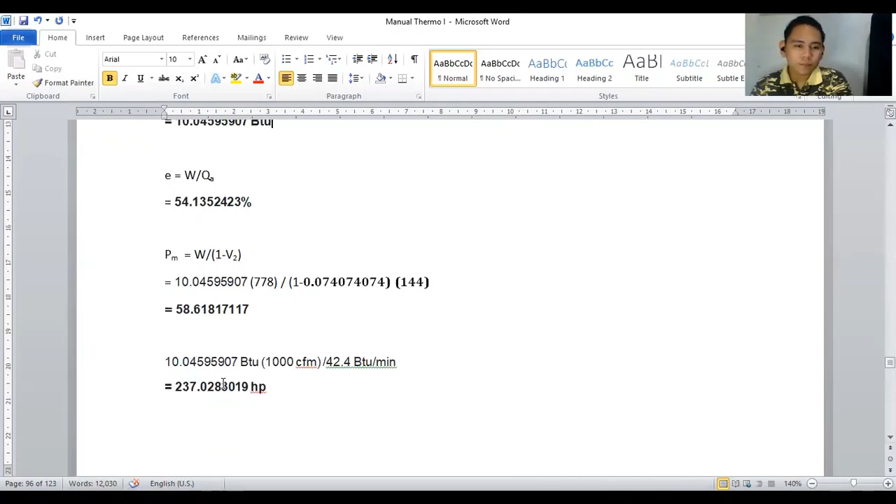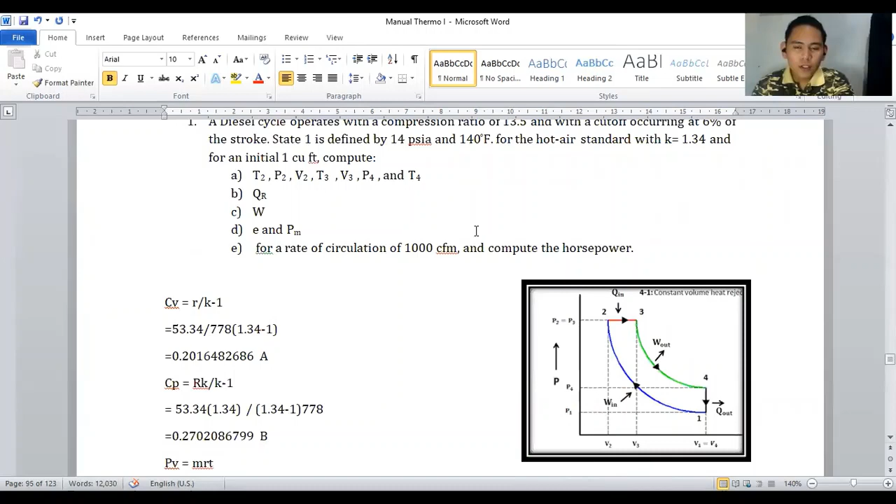And for your letter D, na ba siya? And for your letter E, for the rate of circulation at 1,000 cubic feet per minute and compute the horsepower. All you have to do is multiply the work net by your 1,000 CFM, and you have to convert it into HP, which is, yung conversion natin is 42.4 BTU per minute. So therefore, you have your 237.0283019 HP. And that's it for the problem on diesel cycle.

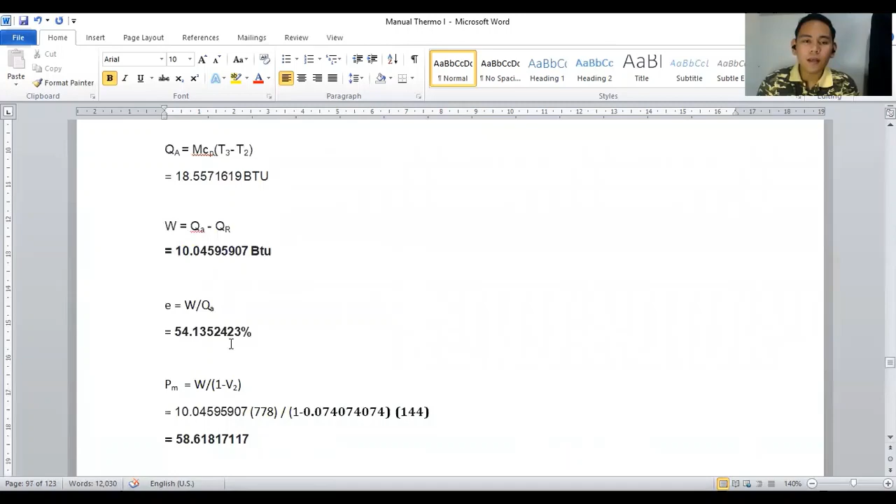Ganun lang din naglalaro ang problem ng diesel.